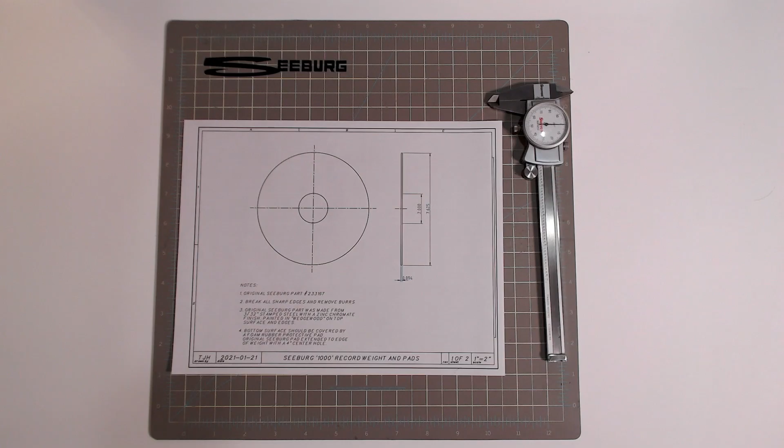In this video, I'm going to be talking about how to make a replacement record weight for your Seeburg 1000 background music system. The problem with these record weights is they tend to get lost in these machines.

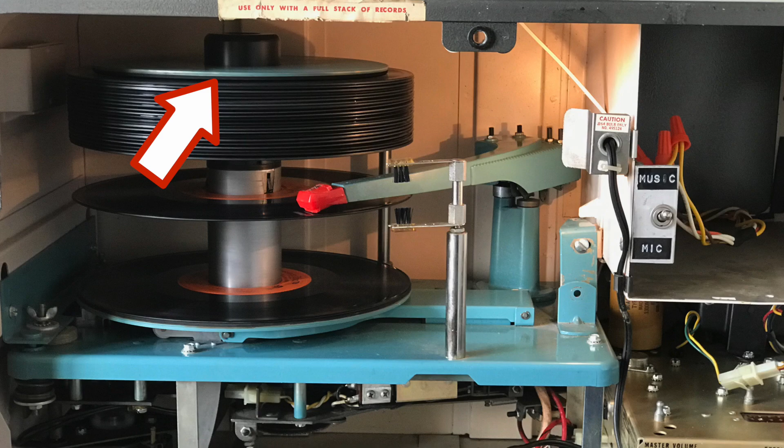These machines were made 50 years ago, and this is what the record weight looks like. It's described as original Seeburg part 233167, made from 3/32 inch stamped steel with a zinc chromate finish, that kind of yellowish finish. It was painted in what they called Wedgewood, that's this kind of robin's egg blue. It's called Wedgewood in their documentation.

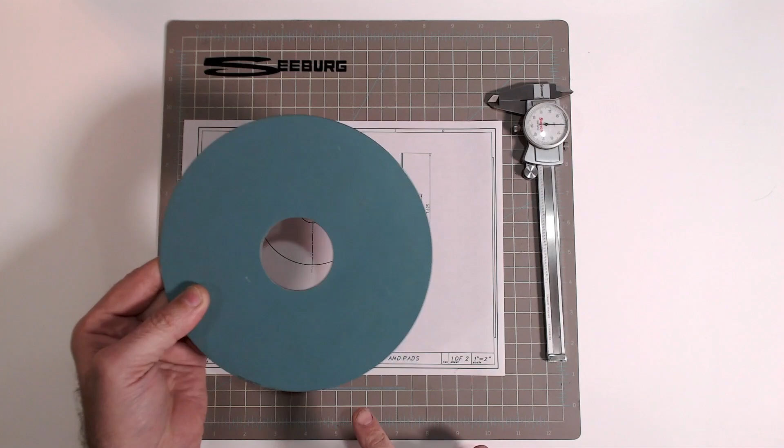So the thing is, if you've got a Seeburg 1000 without this record weight, you can get away with putting something else up there, but it's just incomplete. And this is a really easy part to replace.

So what I've got here is a drawing that I prepared, and you'll see we have the record weight itself, the dimensions, 7.625 inches wide, and these are all going to be imperial because this was made 50 years ago. The hole in the center is exactly 2 inches wide, matching the spindle of the Seeburg 1000.

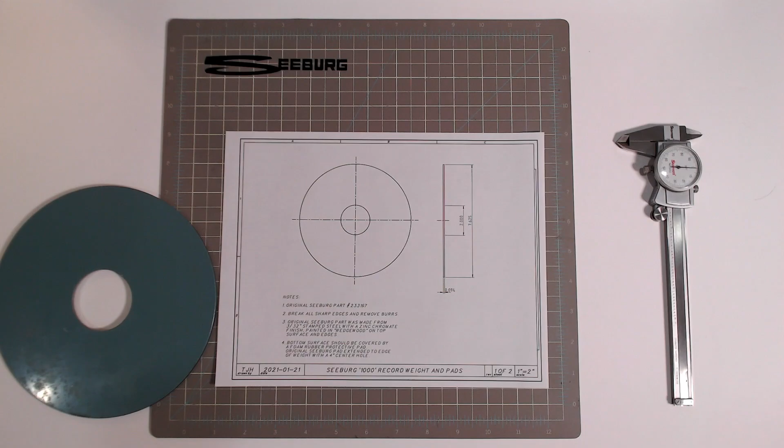I'm going to make this out of brass because it's an easy to work with material. I have a piece of it right here, and it's something many of us could work with hand tools.

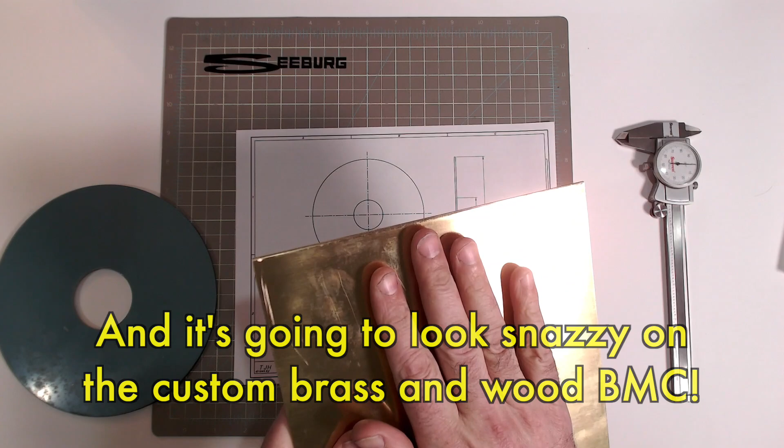So here's the piece of brass that I bought. It's 3/32 inch thick. It cost me, I don't know, like $30, $40, something like that. It's pretty heavy, and it's going to make a nice weight. It's the same kind of thickness as the steel, a little bit heavier. The machine is not going to notice that.

The problem I'm going to face is, how do I get that big hole in the center? The outer edge is pretty easy to take care of. I'm going to use a bandsaw and maybe a little belt sanding action before I take it over to the lathe, because I don't want these sharp edges flinging around. But how do you mount it on the lathe, and how do you get that hole in the center?

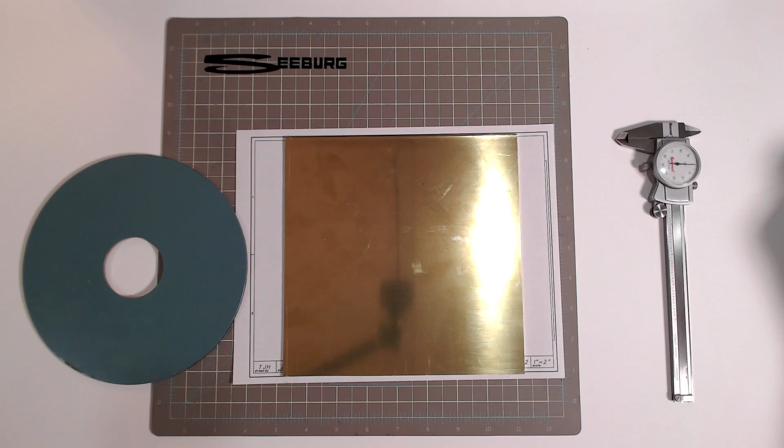My plan is I'm going to drill a hole in the middle of this, and put a bolt with a washer, and use this piece of steel as a mandrel. I'll drill a hole in the end of the steel and thread it and put the brass on the end, and that's going to give me a fairly good way of holding it. Not the most secure way. This is not something I want to put any level of stress on, so I'm going to take super light cuts, and it may very well be a big fail.

Now about that center hole. What I'm thinking of doing is, once I get the donut shape cut, I will then put it on the milling machine and use a boring head to bore this out until it's at that 2 inch dimension. It's kind of a specialty tool to have. Not everybody has a boring head, and not everybody has a milling machine, but my lathe is small. There's no way I'm going to fit this. I don't have jaws big enough to hold this thing. Even though the swing of the lathe is 9 inches, I don't have any chuck that I could chuck this in.

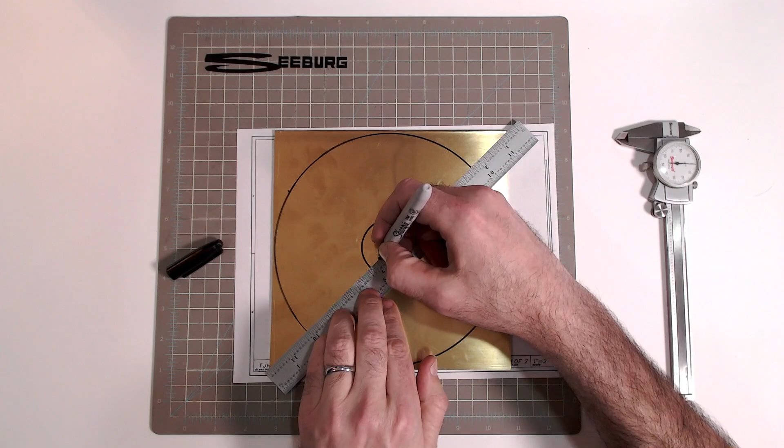Before we get too far, it's probably a good idea for me to mark this thing up a little bit. It doesn't need to be precise, because I'll leave generous amounts of metal, and then make it precise on the lathe. So I'm just going to mark it up using our reel pad as a template. And then I sanded it pretty well here, so I know I take that off, I should be able to... Yeah, that looks about right.

Let's go to the shop.

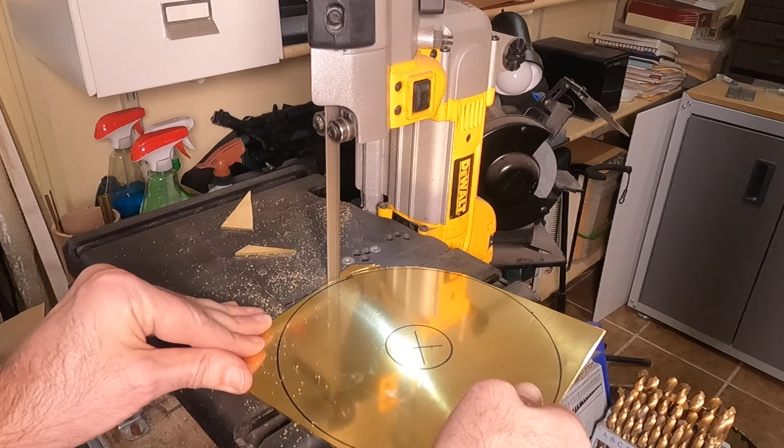Cutting out the brass was pretty easy. Getting these corners off was rather trivial. The only thing I had issues with was little chunks of brass falling down into the slot underneath the blade, but that was not a serious problem.

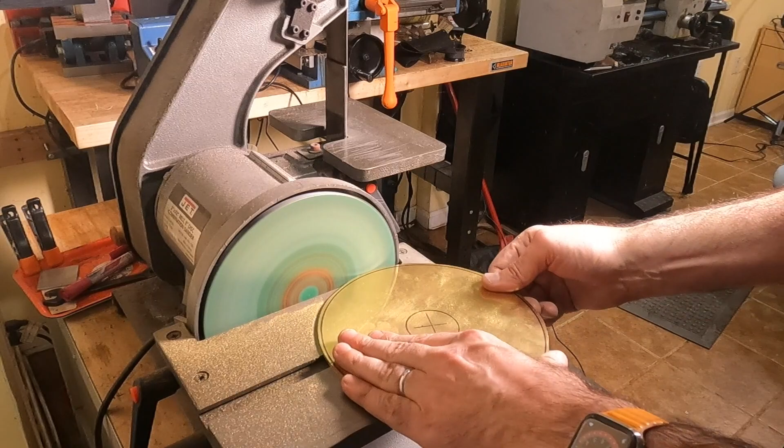Then came the sander, and about 2 minutes of this and the rough edges were off.

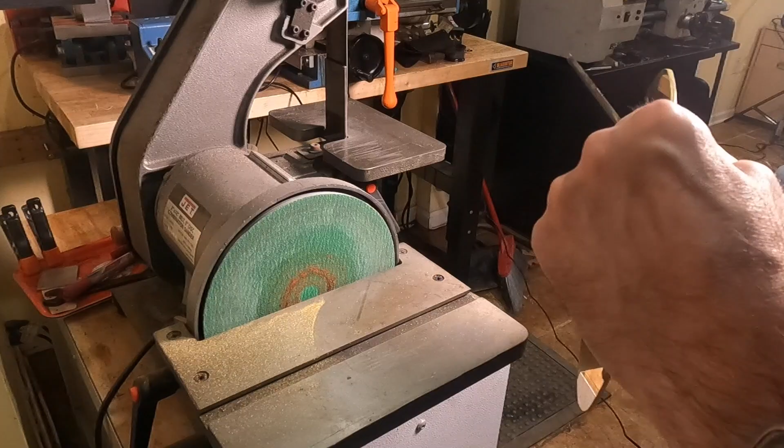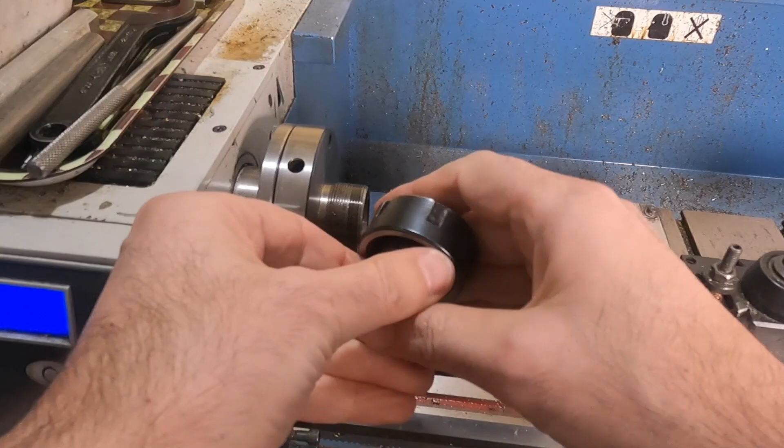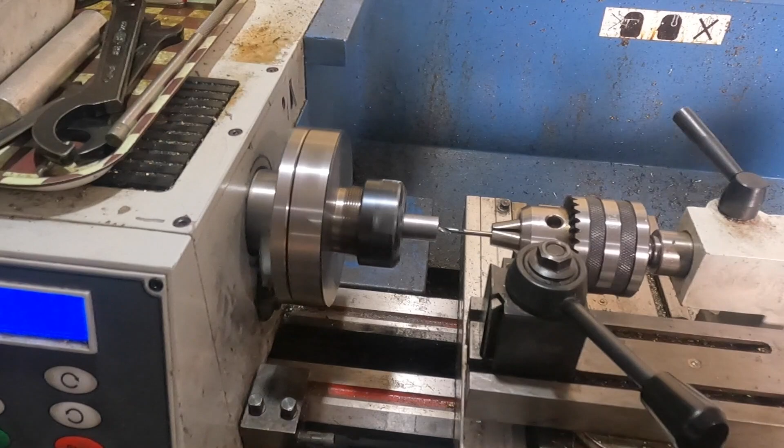Now I'm making the mandrel that I'm going to use to hold the record weight. Taking a facing cut. I'm drilling and tapping for a 5/16-24 bolt. That's the size I had on hand.

Using a collet here. I like using collets because they center the work really well, and you don't need to change the chuck size or anything like that. It's a really convenient way to work with small round stock.

Had a bit of a hassle getting this threading to work because I don't have a proper handle for this that's big enough. All of my handles are small T handles, so I just put it in the chuck and it starts slipping, and I had to do it by hand. I was afraid to start the lathe up. It just was going to be a mess.

That's a bottoming tap. I had to use the taper tap first, and then I ran the bottoming tap in.

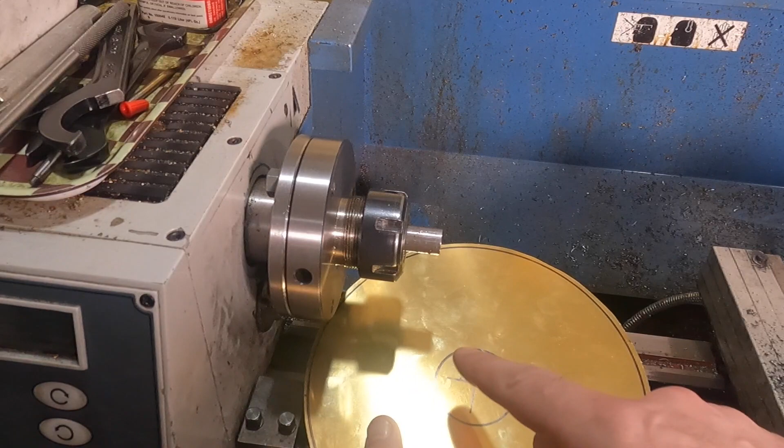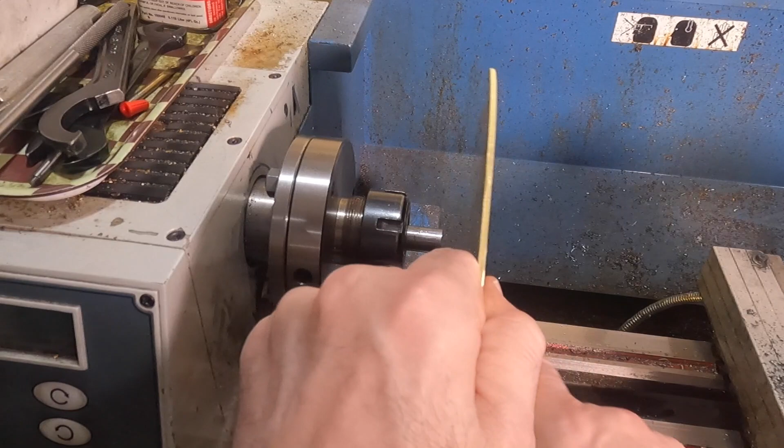So this is how it's going to work. I'm going to have this disc with a hole in it. I'm going to put one washer on one side, bolt on the other, and the disc will be held about right there. It's going to be pretty far out. It's going to be scary looking, and I'm going to step back as I run the lathe and I turn this thing in order to get a nice smooth edge here.

I know I could just run this on the belt sander and file it. That would take quite a bit of time. I've got a lathe that can do this, just barely, so why don't I do it?

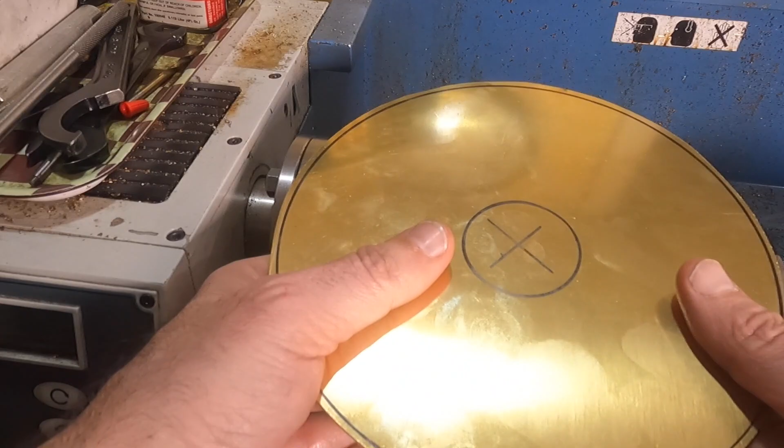So I'm spot drilling and then drilling a 19/64 hole because I'm going to ream it to the 5/16 size that I need for the bolt.

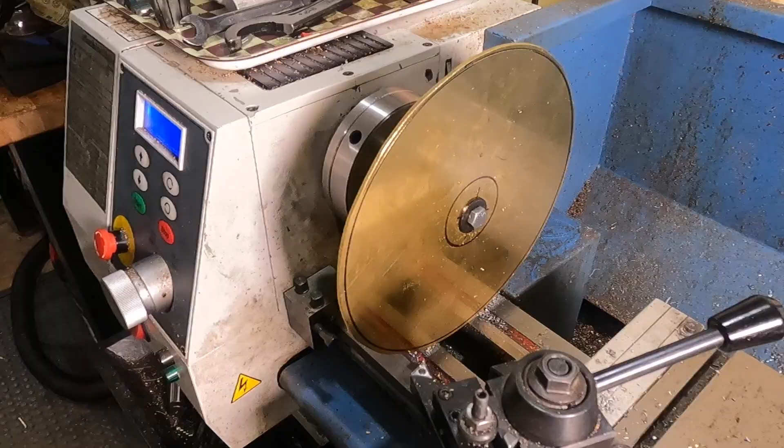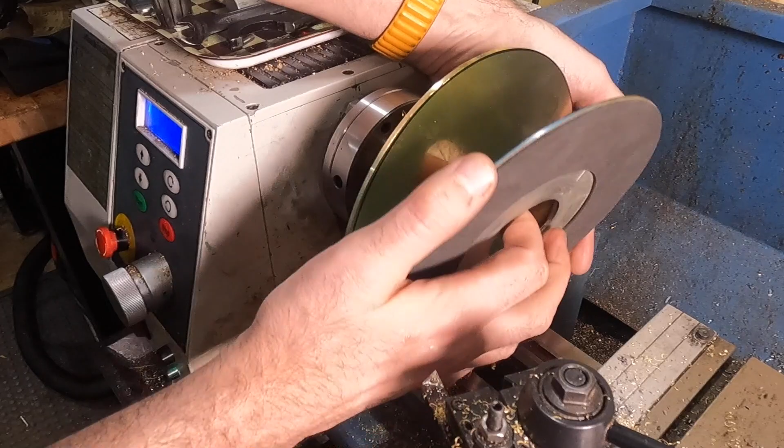And there we go, the scary looking turning happening. It's actually not that bad. It went very smoothly. Only took about maybe 10 minutes to turn this down to size.

Filed the edge and then I sanded it. I was going to polish it shiny, then I looked at this and said, you know, I like this finish. So I decided to keep this finish.

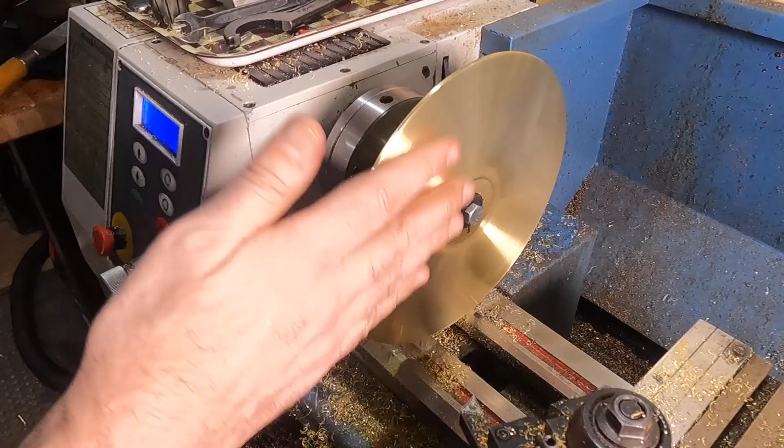Now I got to make that hole. This is the plan that didn't work.

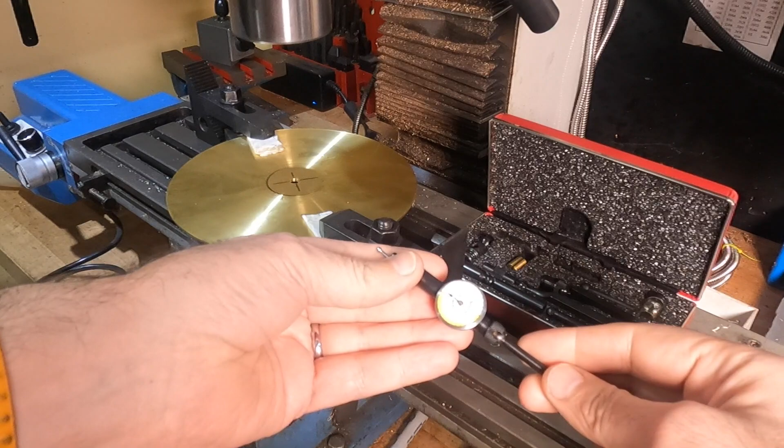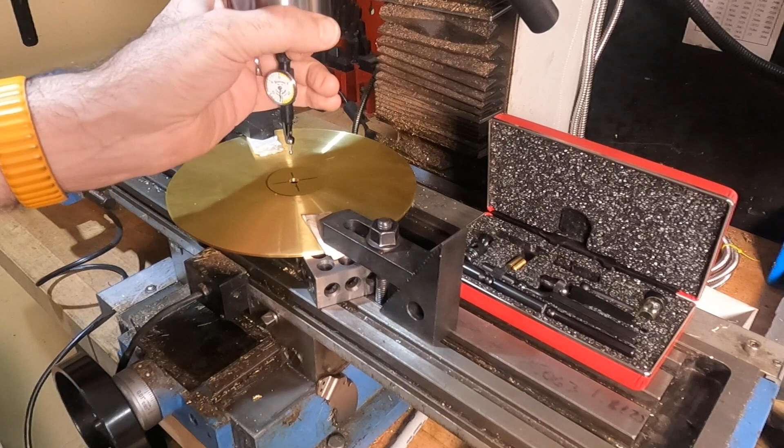So I have to use a dial indicator in order to get the center of the milling machine centered on that hole so that my large hole that I make will be perfectly concentric. And you see I'm dialing it in. That indicator shows within 1/1000th of an inch. I just check side to side, front to back, use a little mirror, and use the hand wheels of the mill to get everything perfectly in position.

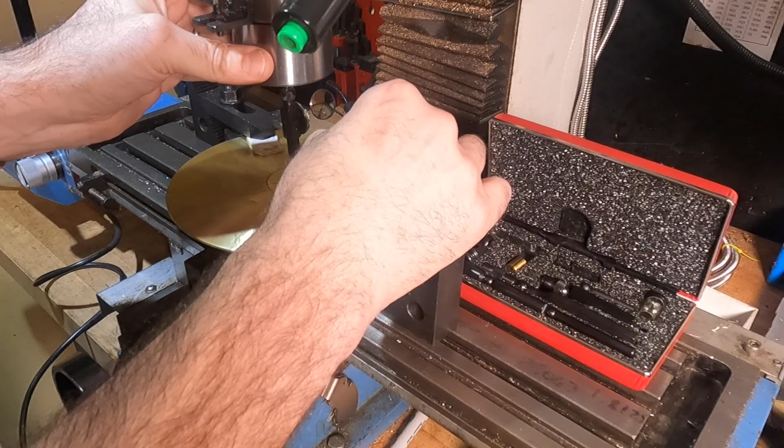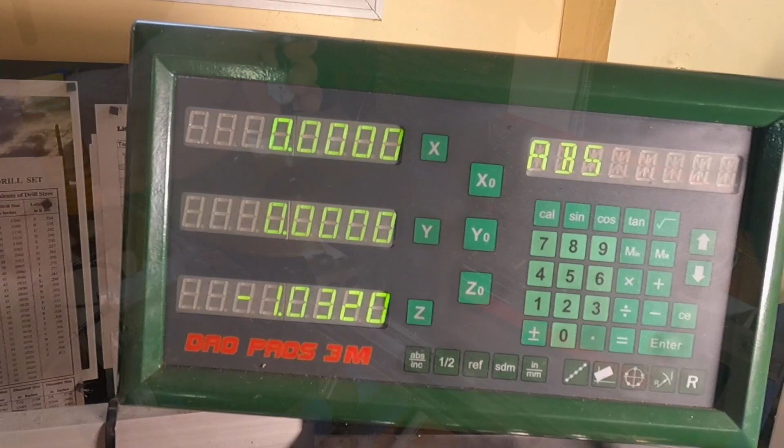Then I get the boring head out, mount that in the milling machine, and go ahead and bore a 2-inch hole. Yeah, that didn't work.

You probably can't see it, but the whole milling machine is shaking. Everything is shaking, everything's rattling. This was not going to work. It's going to take me all day long, and the whole machine was rattling to bits. This machine just doesn't have the rigidity needed to do a hole like that.

So let's move on to plan B. So this is plan B.

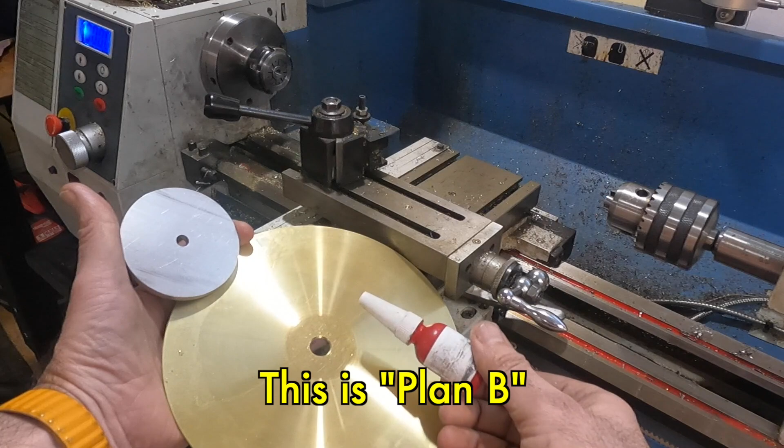So I'm going to have to put a hub with Loctite right there and then grip the hub. That's the only way I'm going to be able to get a boring bar in here and a rigid enough setup so that I can cut this.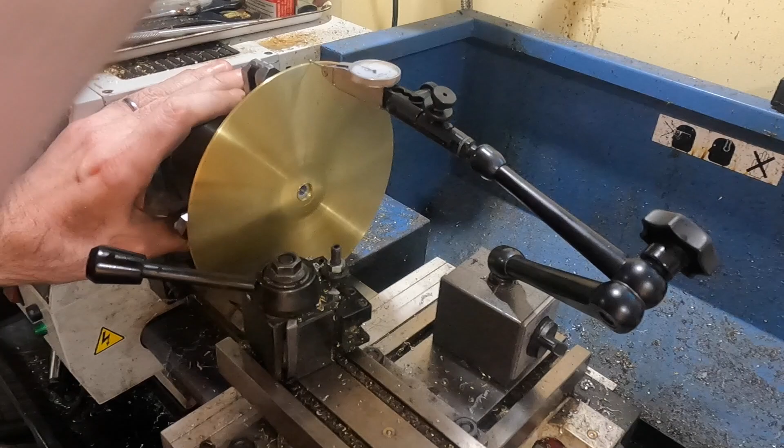So this is how I center it in the 4-jaw chuck. These chucks have 4 independent jaws, and the challenge is that you need to adjust each one of them in order to get the piece right in the center. The way this is done is a bit of a fiddly process where you adjust opposite jaws, and you have this dial indicator that's showing you how far off opposite jaws are from each other. When you're done, that needle should be absolutely rock solid as you spin the piece.

And you typically can get the part within less than 1/1000th of an inch of center.

The pros can do this really fast. Home gamers like me, it takes a little bit longer.

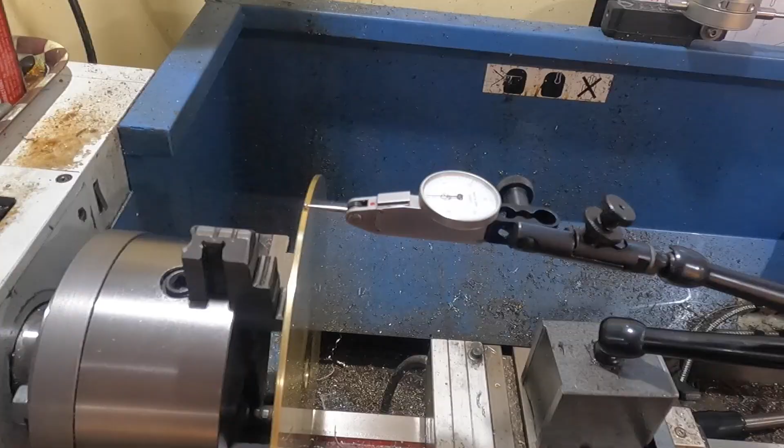All right, look at that. Look at that.

Now the big problem is going to be keeping this thing attached to the piece of aluminum as I bore it. We'll see if it works. All right, here I am, just boring away, hoping that doesn't break free.

What I didn't know was that my boring bar had a broken tip on it, and that wasn't helping things.

Luckily, the part wasn't damaged.

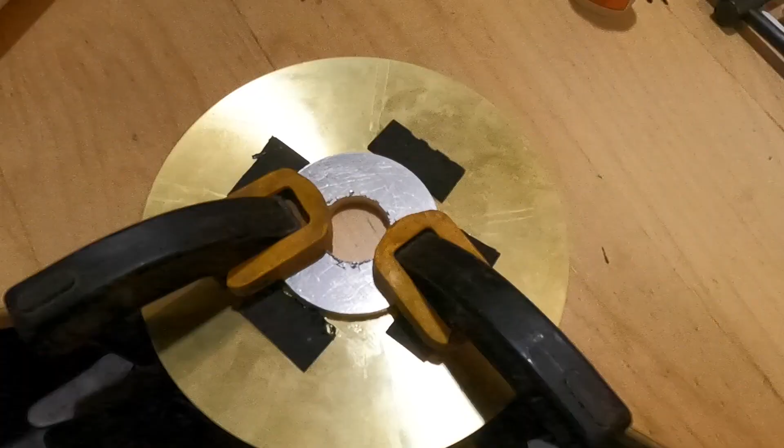Gorilla Glue to the rescue. It's a much stronger glue than the Loctite that I was using.

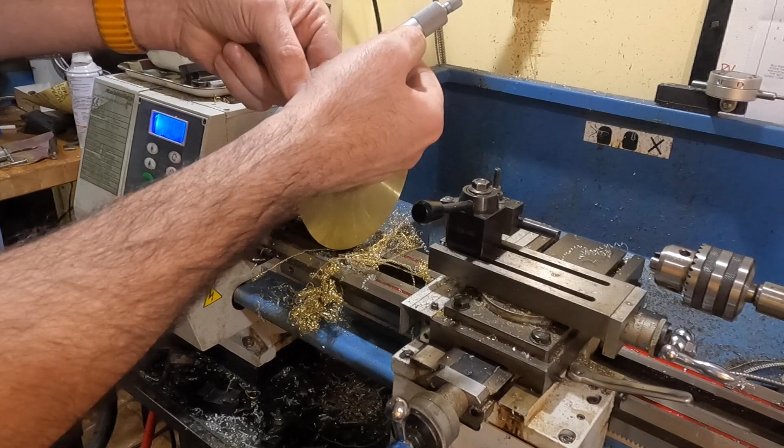1.309. Let's try again. Go a little angle, tip backward. Then pull it through the top, like that. I've got 1.309 right now. Yep, 1.309. Looking good.

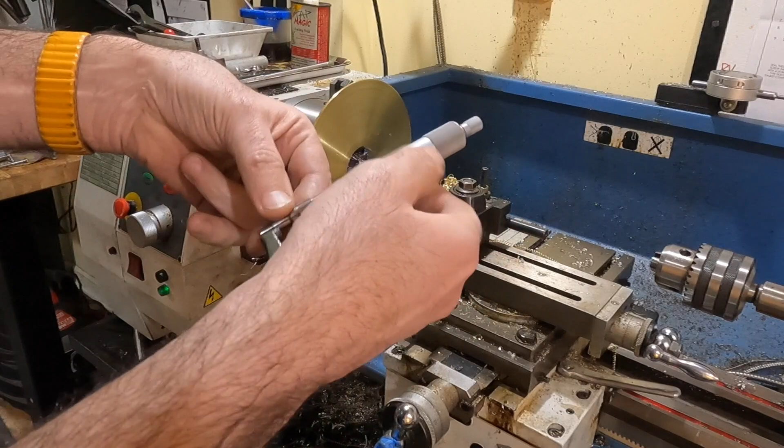So there it is. I've got this aluminum Gorilla glued to the plate, and I'm going to take my torch and go somewhere else and heat this thing up, and hopefully it'll fall right off.

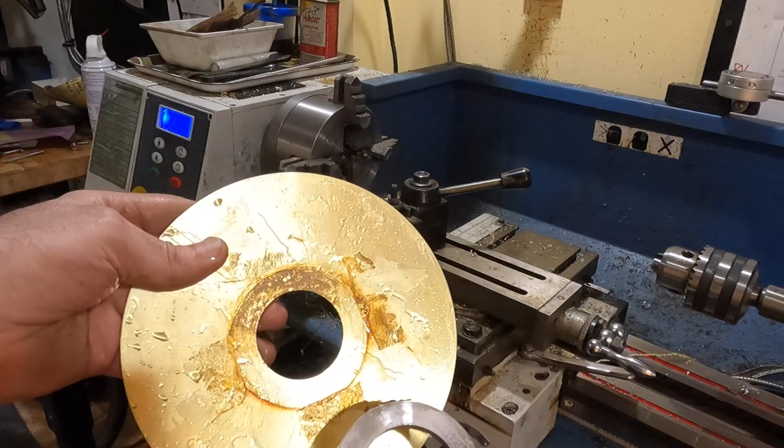Okay, and that worked admirably. There it is. It just, after it got hot enough, it broke free. Now I just need to figure out how to get this stuff off.

Hopefully acetone will do the trick. If not, I will end up sanding or something. The good side looks good. Worst case scenario, this is the ugly side. I'll just put my pad on here and nobody will ever see this stuff.

And it worked. Here I am cutting a new pad for this using the old manual technique. Bit of a challenge to get this centered on the part, and you want to make sure not to stretch it any as you're doing this, because then you get buckling as you get towards the end.

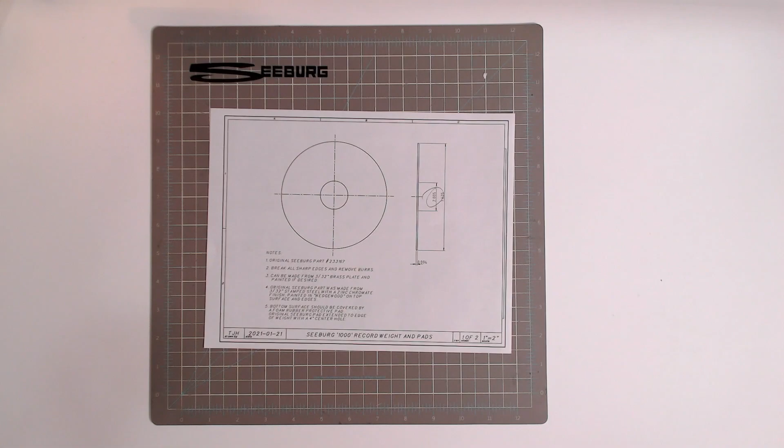There we go. So how did it turn out? Here is an original Seeburg record weight, and here is my version.

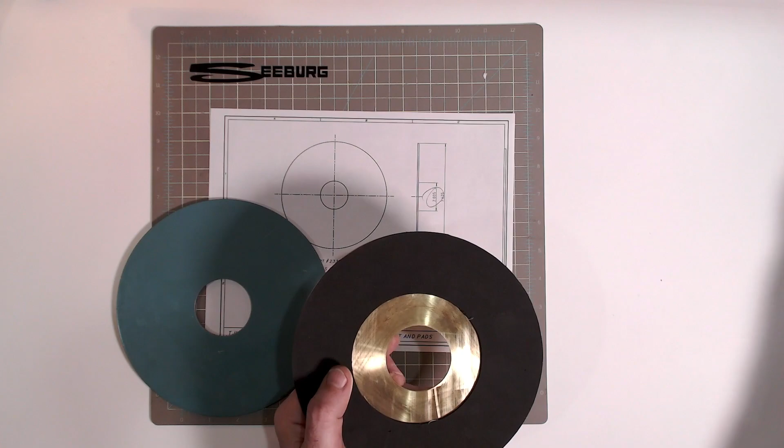You will notice that the bottom, I didn't sand it because this is going to be the bottom anyway. What I did to get all that gunk left by the Gorilla Glue was I simply used a razor blade and scraped it off, and it left these lines that aren't gouges, they're simply scrape lines. And I figured nobody cares about that.

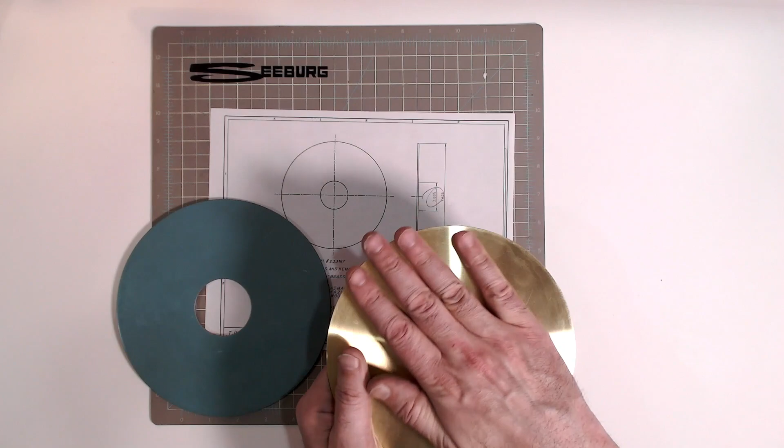I don't need to figure out how to sand this thing on the lathe or something like that. Sometime in the future I will do that, because I do want to give it a nice shine and then put some kind of lacquer on it to protect the finish. For now, this is how it looks, and it's going to look pretty nice on the machine. I'll show you that in a couple minutes.

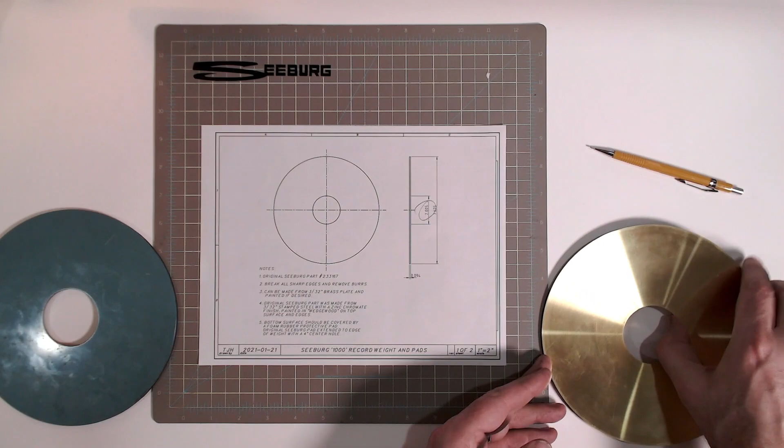I do want to point out a change in the drawing. If you'll notice, I've circled this dimension here. That's the size of the hole. It was originally 2 inches on the drawing, but of course the platter has to fit on top of the spindle, and the spindle is 2 inches wide, and the hole in the platter, when I measured the original one, came out to be 2.006. They probably had 5 thousandths over on their original drawing, and so that's what I did. 5 thousandths over, and that should work if anybody ever makes one of these.

Let's go see what it looks like on the machine. Isn't that a thing of beauty? That's all I have for you today. Thank you for watching.